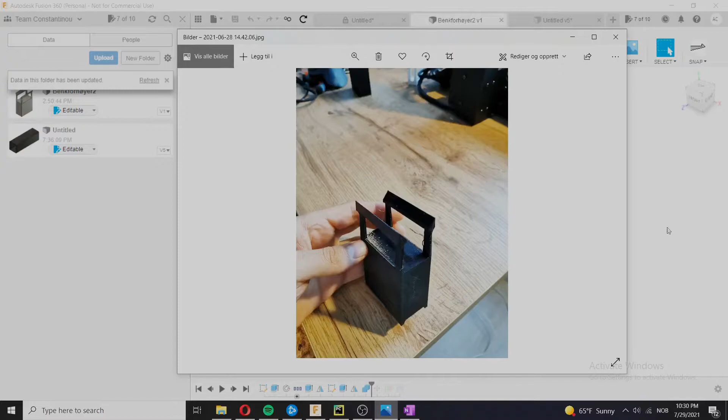Here we can see the finished part. You may be thinking that a shape as simple as this would be easy enough to just make a sketch of and draw it. And in many cases, that approach will work well enough. However, I hope to persuade you that using this tool is absolutely worth it, even in such a simple case.

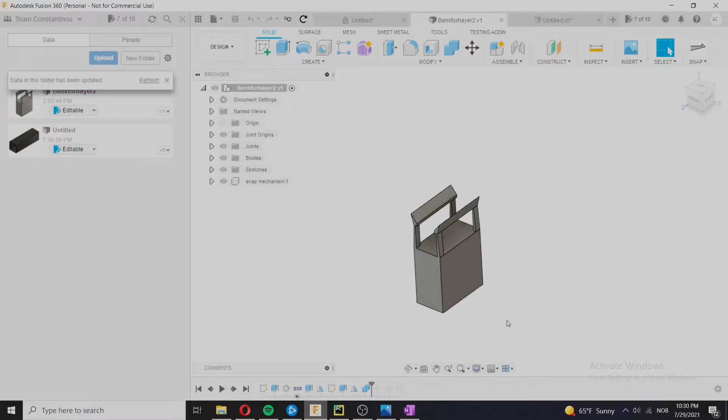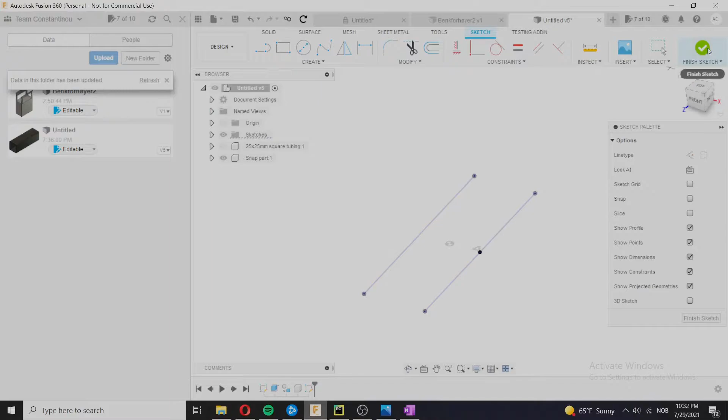We already have the 25 millimeter square tubing available, which we will use to position the cantilever. I'm going to make a sketch here. I'm going to project these two sides. Then I'm just going to make a point here. We will put the joint origin here, orient the green vector towards the tubing, like so, so that the cantilever will also point that way.

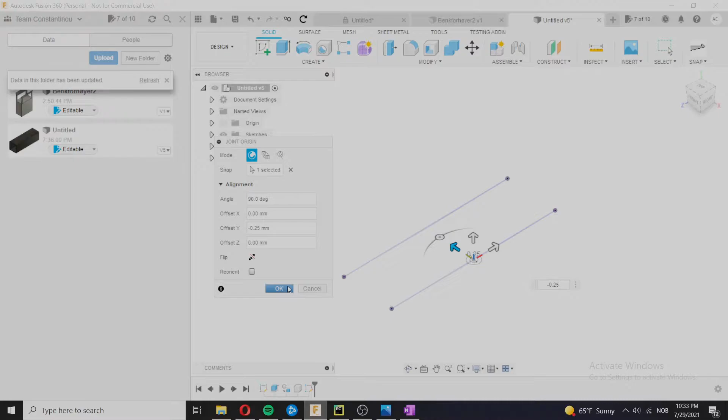And we're also going to move it slightly away to create a small gap here, 0.25 millimeters. That's just to prevent any tightness and irregularities from messing things up. Okay, so we have a joint origin there. Now we can use the add-in. We'll click here. And now we see the cantilever appear, and we just need to give it the correct properties.

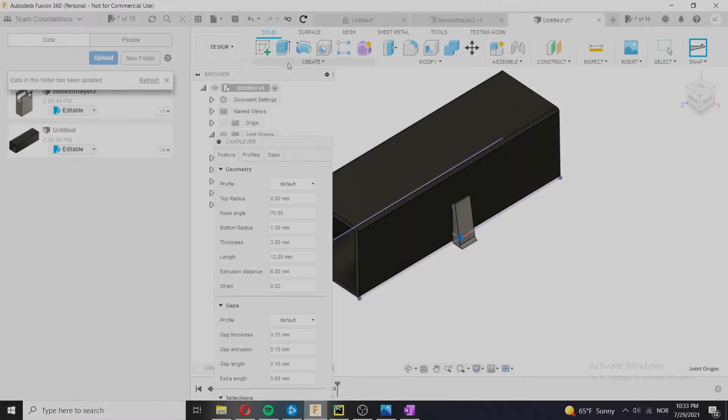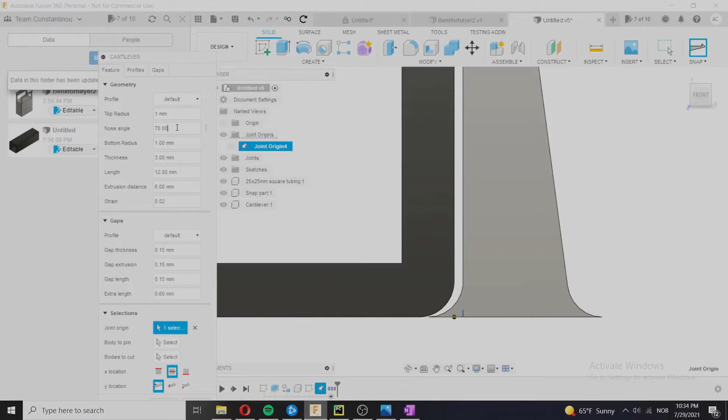Obviously, this is not ideal. The top radius would ideally be 1.5 millimeters, but wait, hang on. Would ideally be 1.5, but that's not going to work with this. So we're just going to put it to 1. The nose angle, of course, needs to be 90. The length needs to be 25. However, again, we're going to add some spacing here, so I'm just going to make it 25.25. Bottom radius has to be 0, as you'll see.

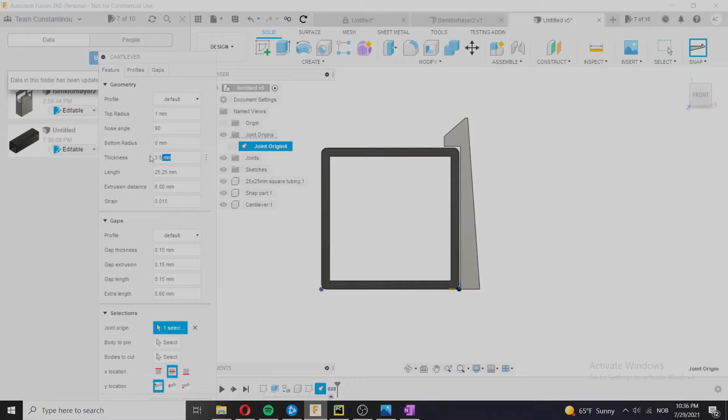Now, in regards to the strain, we're going to make this out of PETG. PETG should be able to handle 2 to 2.5% strain, but we're still going to reduce it down to 1.5 because that's going to make it easier to get off. We're also going to increase the thickness to 4, well, maybe 3.5. Yeah, we're going to go with 4. We don't want it to be too fragile, so we increase the thickness to avoid that. So it's like a trade-off.

We'll go to the extrusion distance and we'll put that at 50. You can now notice what happens if I change the X location. This is the origin point of the cantilever, so we can change the X location. You see what happens here? We're just going to keep it in the middle. You can also play around with this, but that's rarely a good idea.

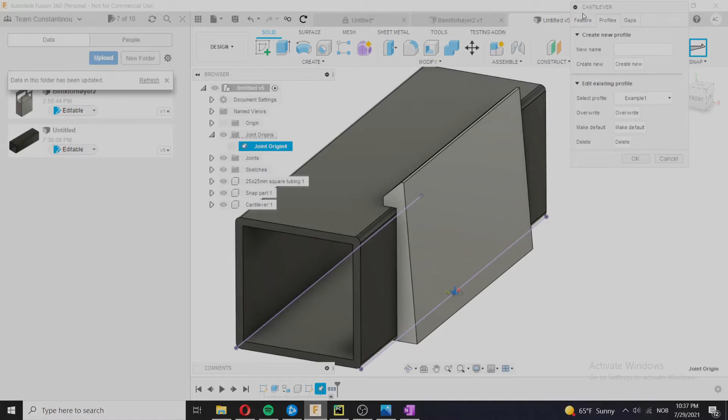Okay. Before we click OK and create this part, we're going to save the profile. Just going to save it as example 1 and then go OK. So now we have our cantilever part here.

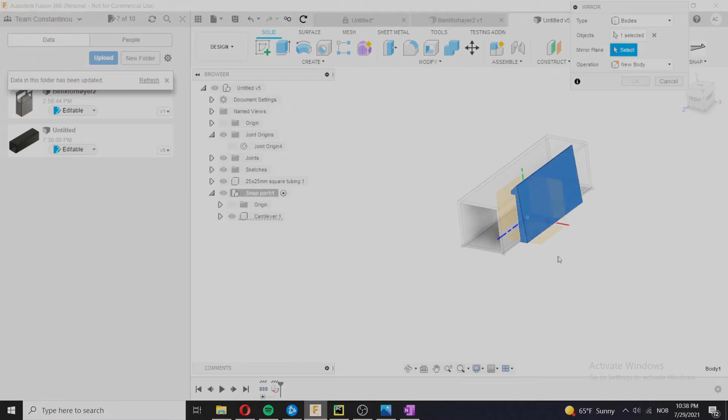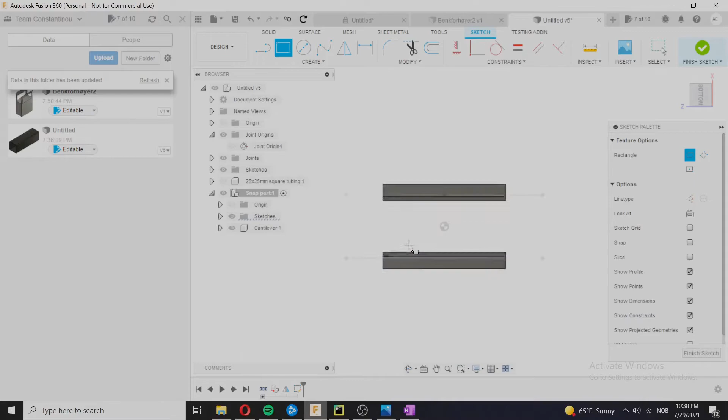What we could do now is we could, for instance, drag this into our snap part like so, and then we'll mirror this body over the plane. Oh, come on now. And we'll look at new body. And we're just gonna finish this. I'm gonna have to project that. Okay. And then finish this up like so. Then we're just gonna extrude the whole thing. 60 millimeters.

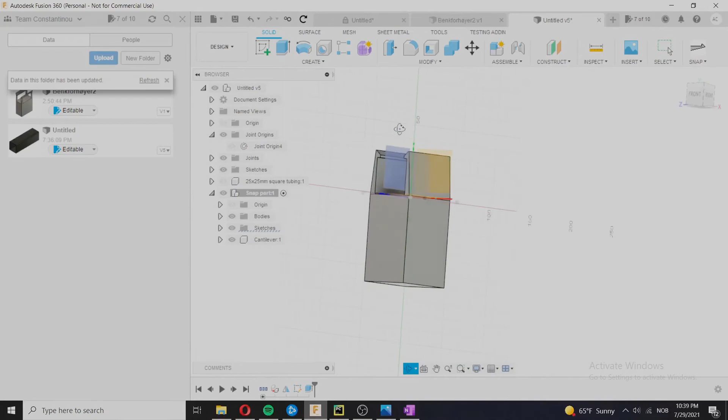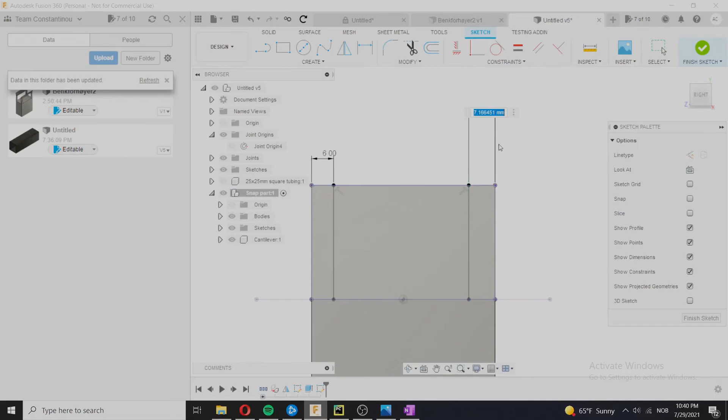Finally, we're gonna make the middle hole. Gonna quickly do that. Gonna make this 6 centimeters. Oh, sorry, 6 millimeters on each side, like this. Just gonna project this thing right here. Does that work? Yep.

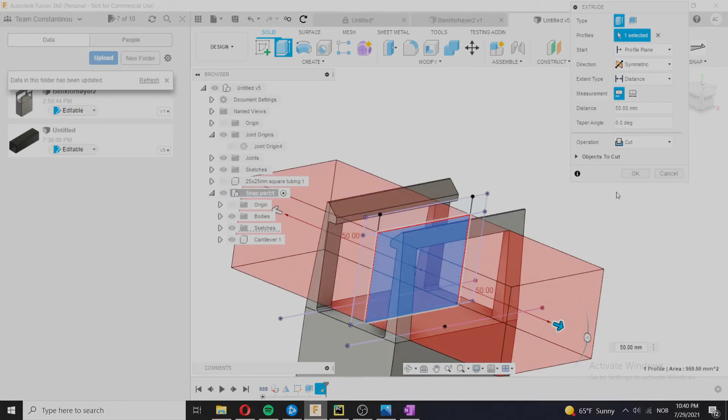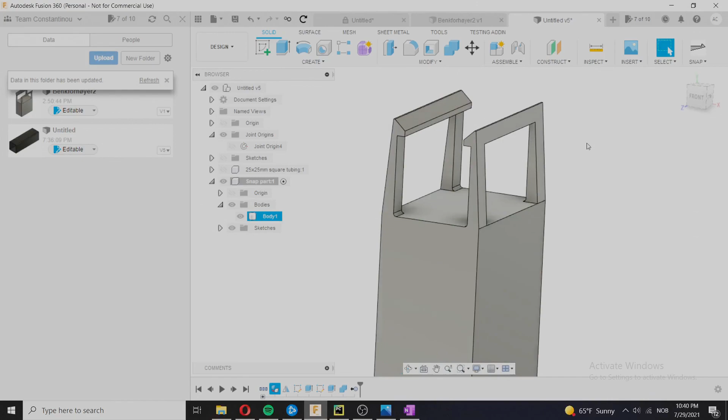And that's it. That's the part. One body. Okay, okay, it's not one body yet. Sorry. Excuse me. Now it's one body. And we can just remove this. So that's the part finished. And we also have the geometry stored here, remember? So if we want to go back and change it and make it new, whatever you want, you can do that.